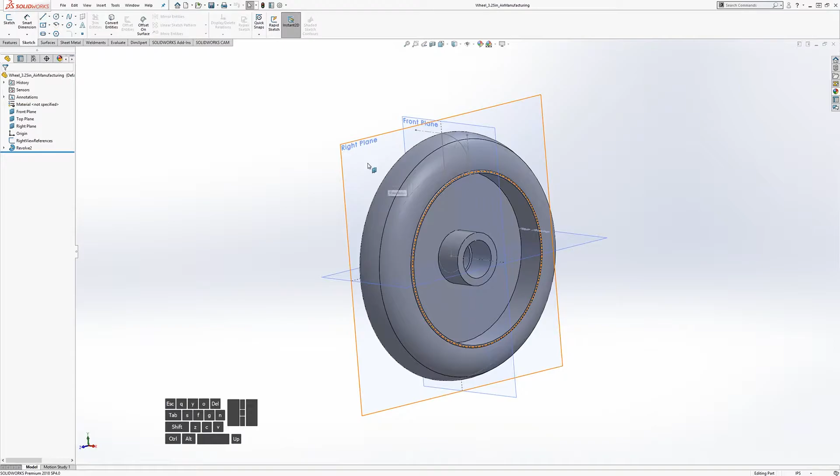Alright, so we're going to do the cutouts now. We're going to start off in the right plane sketching, and I'm going to check out our pictures here.

The cutout starts just a little bit outside of the outer hub diameter, so 0.75 instead of the 0.7 we had here. Also we have the measurement of the spokes, so they're 1/8 inch, 0.125. There are 4 of them, and you can kind of see there's a radius on each corner.

So we're going to use the circular pattern. We just need to draw one of these cutouts and then pattern it around the circle.

So if we start our sketch, let's say we make a center point arc like that. And if we do it the wrong way, we can just sort of back it up. There we go. Let's close this up, just to start off with the concept here of the cutouts.

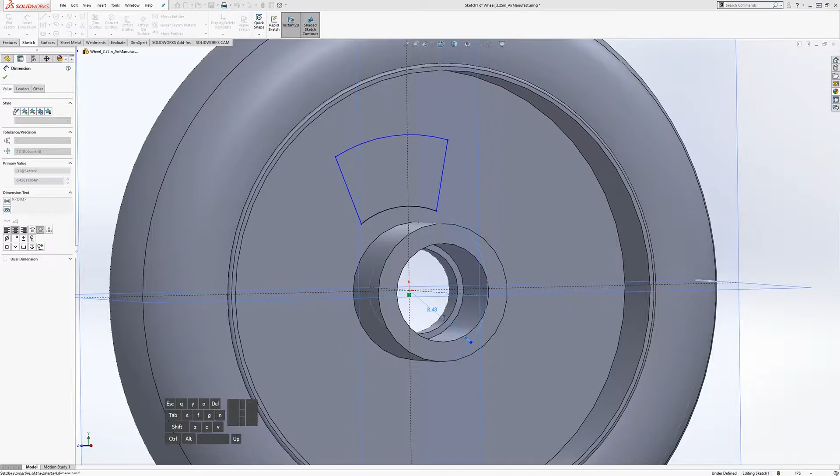We're going to need to use some references to get those measurements accurate here. We know from our measurements that this was 0.75 from here, or a 0.75 inch diameter. So we could just straight up tell this that it's 0.75/2 and give this, just for illustration now, an arbitrary one.

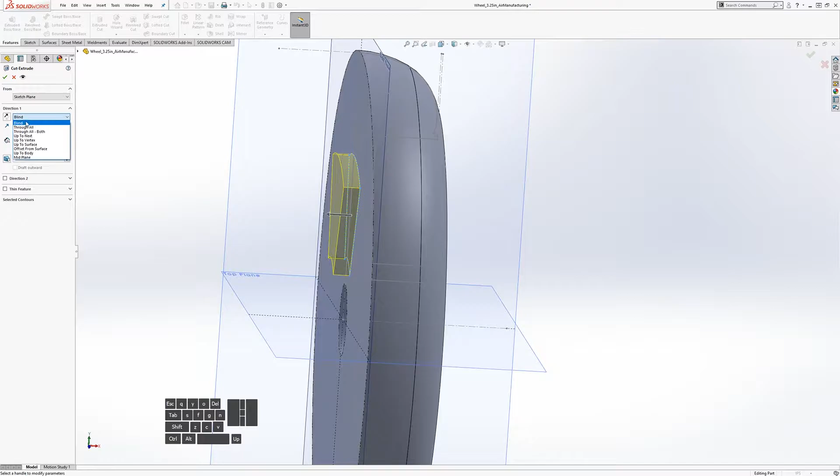Let's say we use this sketch to make a cut. It's coming from that side, so that won't do anything. So we're going to make it through all, and we need to flip its direction.

That's going to start off looking about right, but we want to just keep this sort of more true to the way it's manufactured. The intent of the dimensions here is that there's a small...

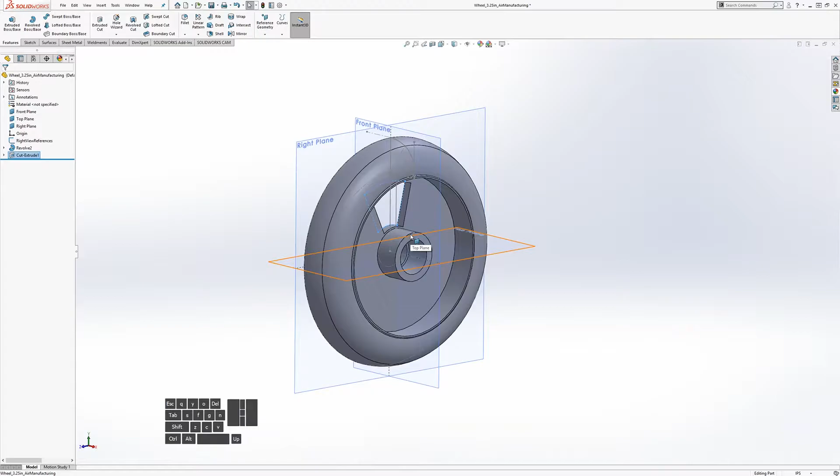...space here between these two radii, and I know that Air manufacturing produces a bunch of these wheels with different versions of the same design. So like in your shop you might have this 3.25 inch diameter wheel, and there might also be some 4.5 inch diameter wheels that look the same in terms of their geometry but are different sizes.

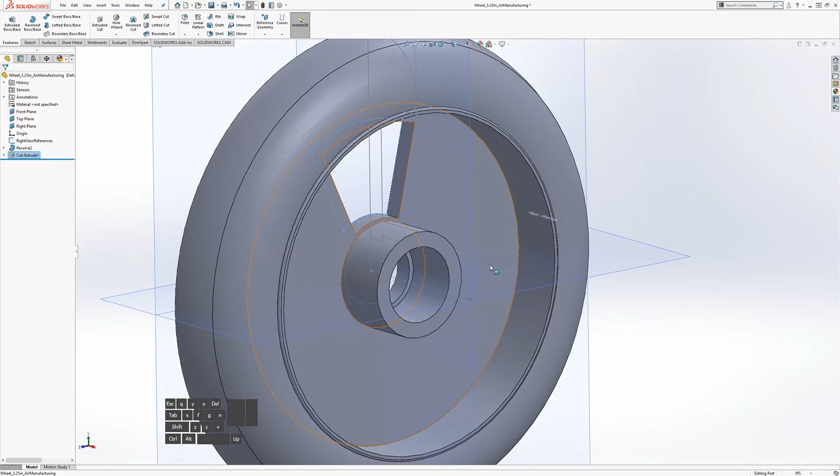In that case you would want to take this stock part and just save it as a different diameter, then modify as little as possible. So in general, it's good practice to, instead of doing what we did, take measurements relative so that the intent is there, and if you change something, the intent is still there.

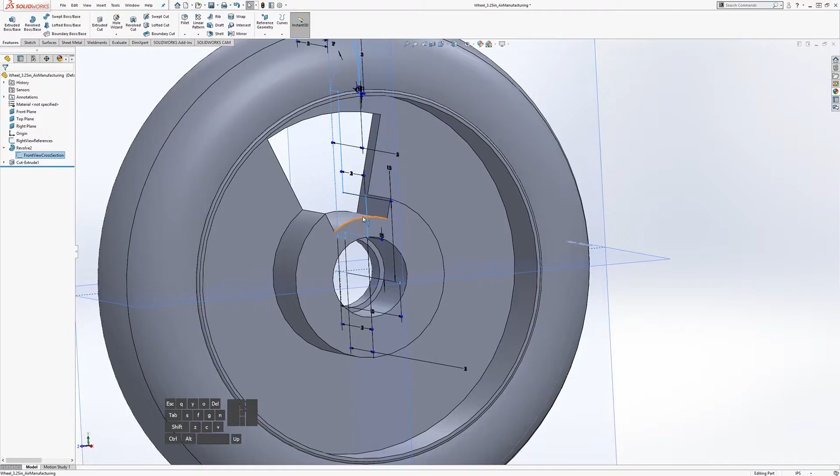To illustrate that, let's go back here and start to change this wheel to be more like a 4.5 inch wheel. So we could tell it that it's 0.5, and then whoops, we have kind of a bit of a mess that doesn't look the way we want it to.

We have to go and find which other dimension to change to make it how we want. So instead of that, we're going to use a relative reference, and it'll be able to update whenever we change it.

So if we go back here, let's get rid of this guy. This one's unconstrained now, and we have this from the previous sketch we can use, but we really want to take one of these, either this guy or this guy, and we can project with this projection. Convert entity is equivalent to projection.

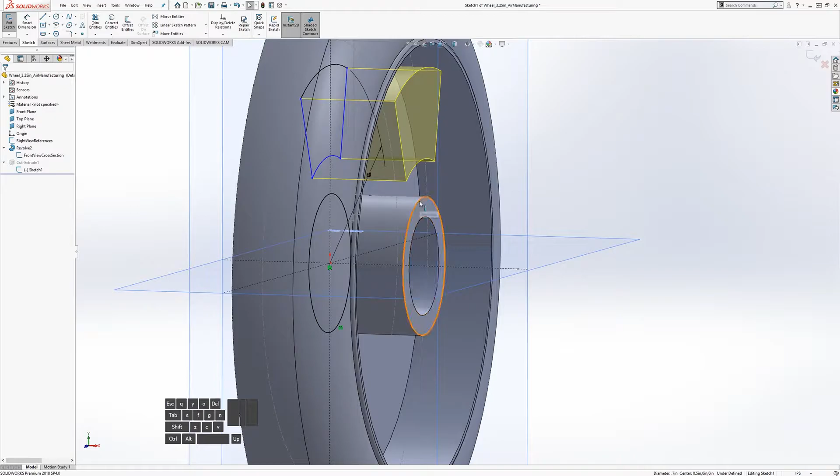It'll take this plane and sweep it out, and then anything it intersects will project itself onto the plane that we're sketching in. So you can see that worked, and we could use this as a construction, but we're going to be changing...

...this is going to be filleted later. It's kind of confusing if we're going to be projecting things that get filleted later, then it could get kind of messy. So let's not do that.

Let's instead - we know that no matter what we do with our features, if we fillet this edge, our sketch will still be the same thing. So we'd like to refer to that instead.

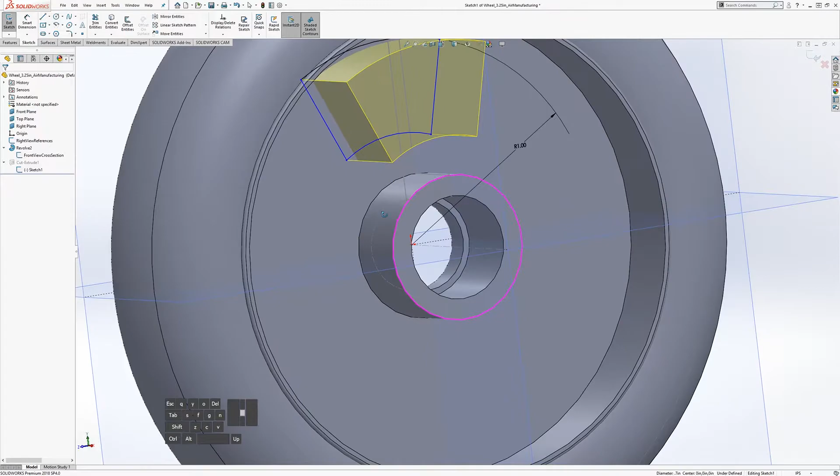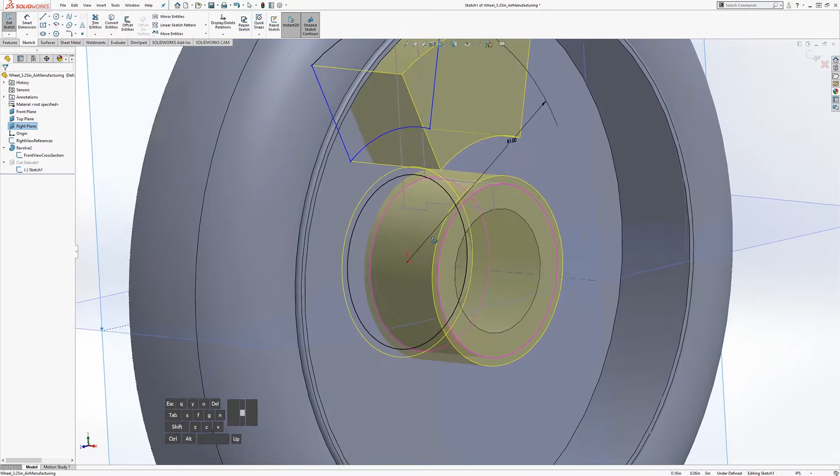So how about we make a circle about where we want it, and let's make that circle coincident to here. That's going to be a construction because we don't want the cut to go all the way down to there, and we don't want the cut to include all this circle. So that's for construction, and now we can refer to it...

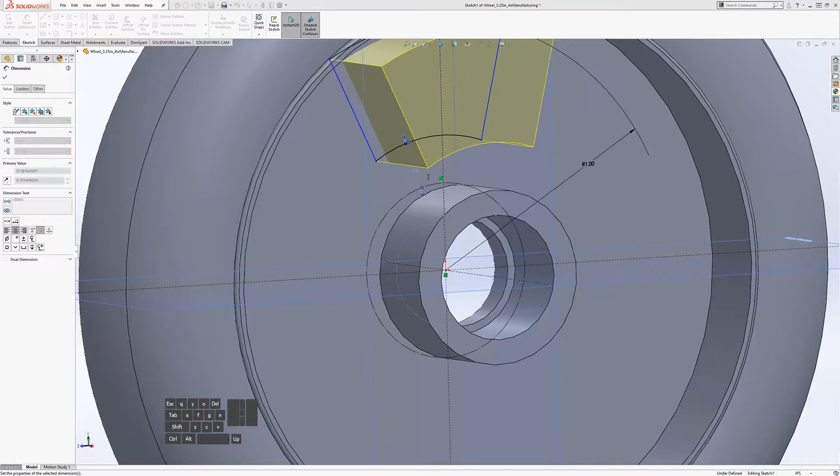...and tell it that this is 0.05/2. And now, if we were to exit this sketch, that looks the way it should, the way we want it. And if we go back and change this to 0.5, there we go - a cleaner wheel with less work.

So that's why we're going to use those sort of relative smart dimensions here to upstream sketches. So if we go back, and let's just Control Z that size change. We're going to need to give this fillets, give the right spoke width.

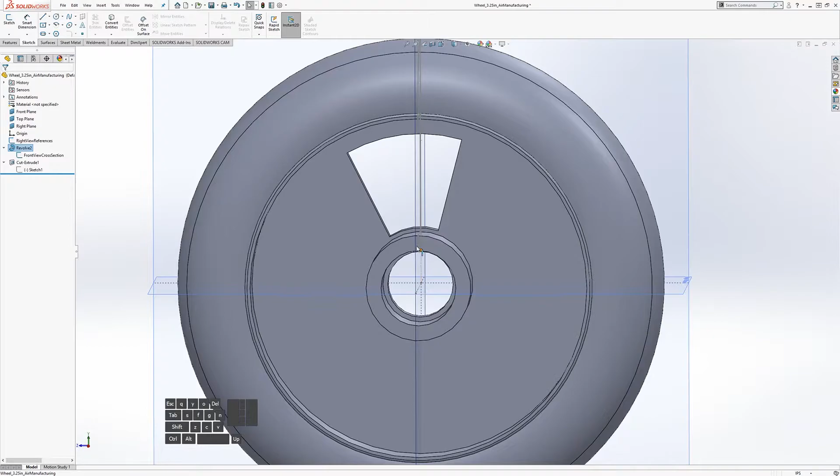So it's going to be more convenient to map out a 90-degree or a 45-degree segment and do the pattern off that. Let's go back in here and make some more reference geometry for us. So how about we... that's not what we want it to look like.

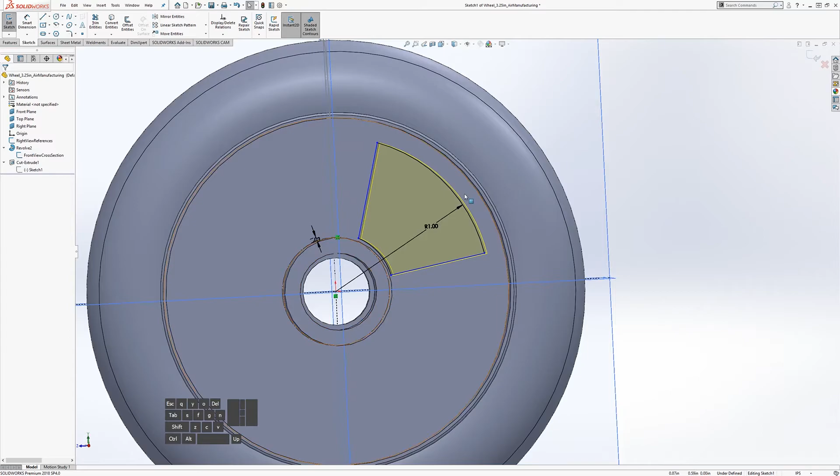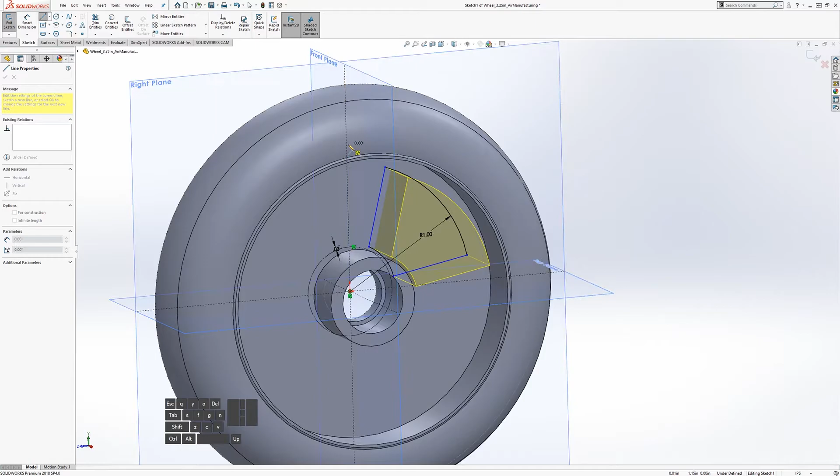Something like this. So let's map out a section of this symmetric section, a 45-degree segment here. Let's hide this so we're not referring to two different sketches at once. And let's first visualize that one and hide this one. We're just going to make a line over there, and then how about a 45-degree line to that?

So let's just get that at 45 degrees. Make these construction.

And we also know that we're going to cut out the same gap here on the top, on the inner wall of the rim here. So let's make another circle like that. So this guy.

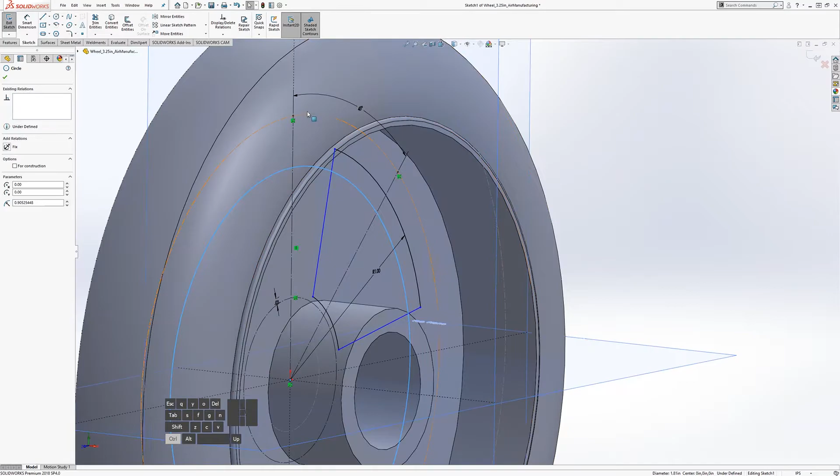Now we could use either of these sketches. May as well, actually this one is already in the right place, so we could already take a measurement off that one. Okay, so that's telling us that we're having an overdriven constraint here because I forgot to delete this 1-inch radius over here.

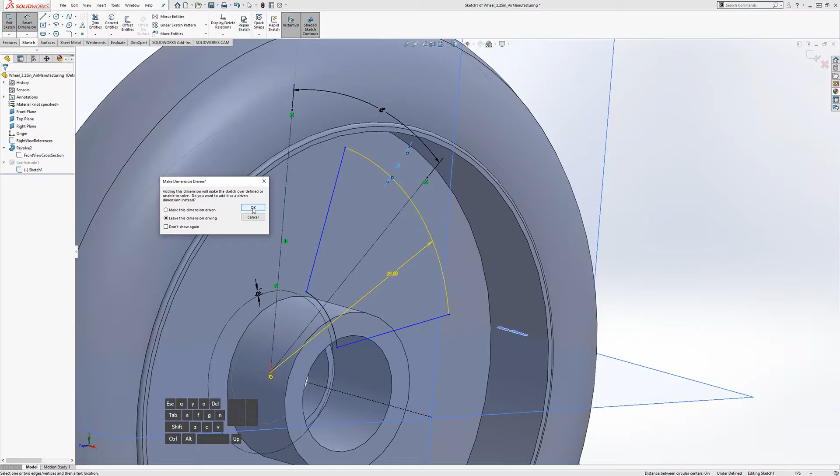In that case, we can choose which of these drives the dimension. So if we leave our new dimension driven, then it's just going to be sort of a reference measurement. If we make it driving, we're going to have some overconstraints here, as we can see.

So if we chose instead to leave this driven, then you can see it shows up gray, so it's not a real constraint, it's just a measurement, and you can actually refer to it. So sometimes it's useful to just have a reference measurement.

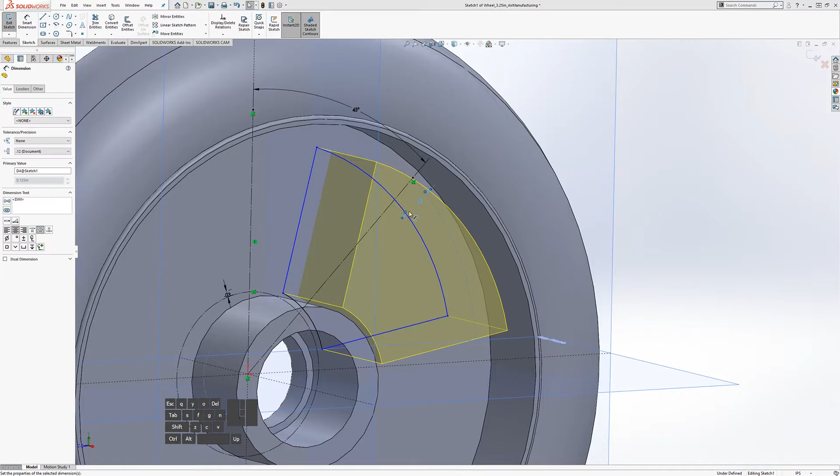But in this case, we are going to get rid of this guy. So we have to get out of here, delete that one. And then this is a measurement, so it's telling us we can't change it, it's just a measurement. But we're going to go in and tell it to be not driven. We could have also just deleted it and remade it again without this 1 inch radius, and then it would be able to tell that we implicitly want it to be driving that.

So I'm going to go here and change this to 0.05 over 2. So that's good.

Now we're definitely going to want, so let's say, I'm going to bring this up here. Let's say we're gonna cut out this 45 degrees, make these circles here so that it's smooth, and then reflect that on this side so we have sort of a cutout on the top, and then we'll do a circular pattern all around. So here, this guy we can already tell we want it to be collinear over here.

The other one, we can tell it we want collinear over here. And then we have to make the radii over here.

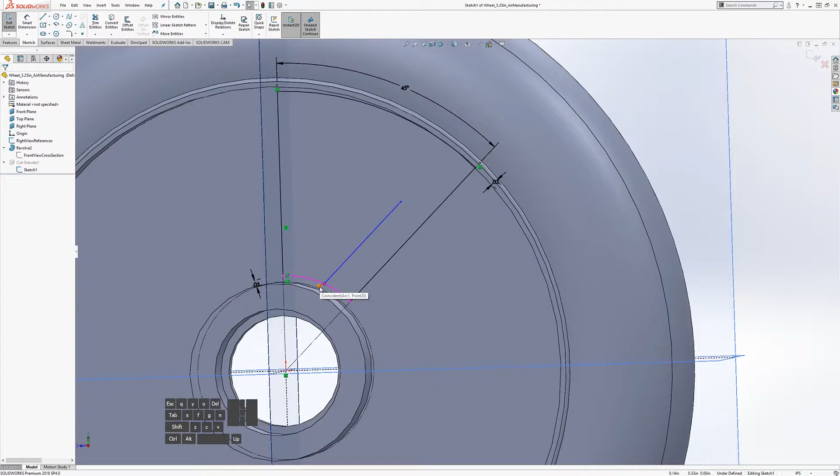So sometimes if you don't want that, you might just want to, instead of bringing it close to that line, just purposely put it somewhere else so that it only created the coincident here, which is all I want for right now. So I'm going to make another coincident, make this line parallel to here, and then I can give this guy a dimension of 1/8 over 2.

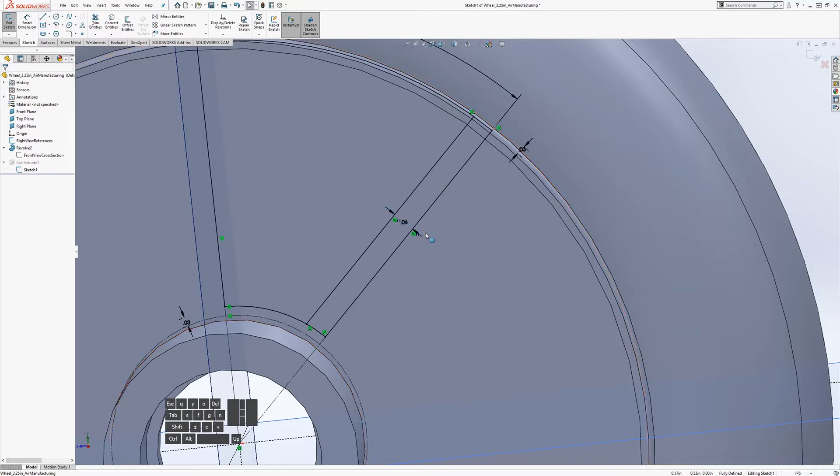So, is that it? That's 0.125 over 2, there we go. So that's half the width of a spoke. So that'll help us to create the spoke. So the other side of the spoke is going to be here.

We can start filleting in here. So we're going to create the other geometry here. So let's get tangent arcs. So we need endpoints to make tangent arcs actually. Let's make a circle instead.

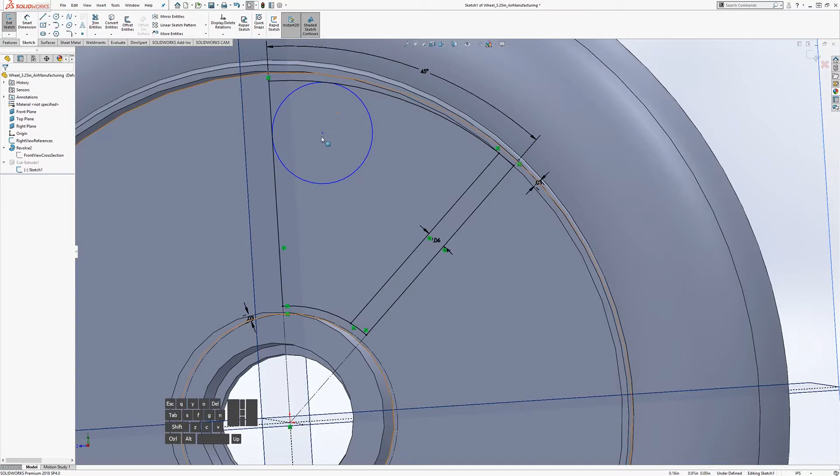And we can choose that to be tangent here, tangent here. So that can kind of be one of our fillet radii, and we're just going to end up taking this portion of it. And let's do that for the other corners. So actually, well, this side is going to be reflected, so we don't actually need it on this side. We really need it on this side over here.

Tangent to here. Tangent over here. Let's make another one down here.

Whoops, I chose the point by accident. Okay.

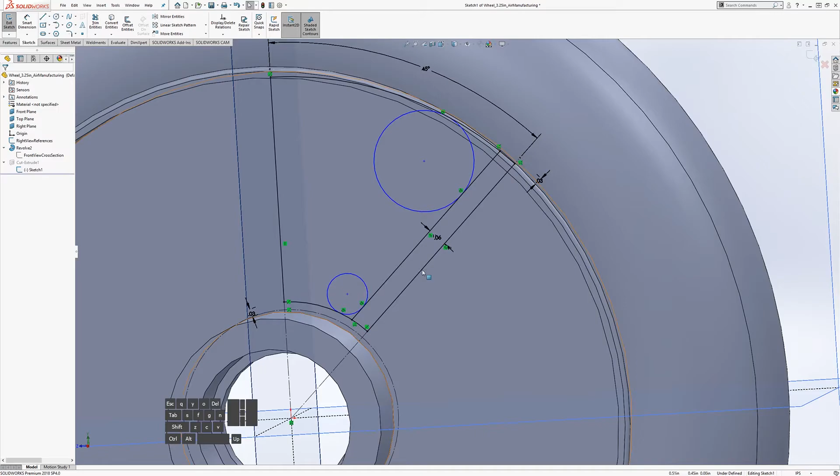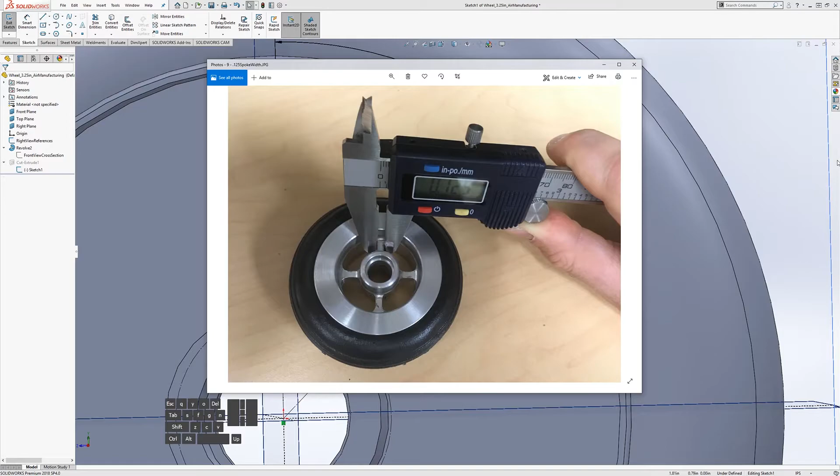So we kind of need a measurement now of what the radius of the circles is, and that's a bit hard to measure. You could take several convex shaped objects, like cartridge bearings or something of this approximate size, put them in there and see if they fit well, then measure the diameter. It might take a few trial and errors to get the approximate radius, so let's just do it until it feels about right.

For now, I'm gonna tell this one to be 0.5. No, that's too big. Let's say 0.3. This guy, let's try 0.125 to start out with.

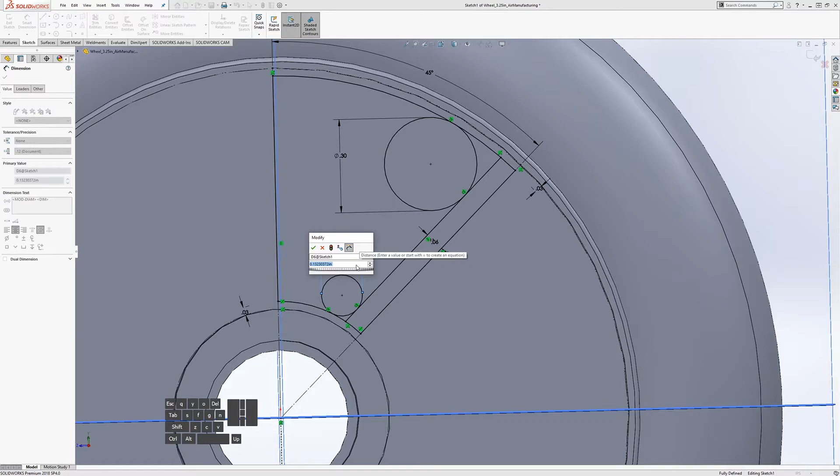So you can kind of see how we're going to use this: this line will be part of the cut, then we'll transition into the circle, then this outer line. All of this will be the mirror line for the cut, and then this over here, and we'll do that part of the circle.

But we're gonna do this cut in 2 stages actually, I think, so that we can easily go back. This is a pretty clean sketch.

If I start adding to this, cutting out, trimming, I can go over here and use, let's say, the trim. A lot of people like this power trim just to start editing your sketch, but it starts to get more complicated. You can end up with things you accidentally didn't want.

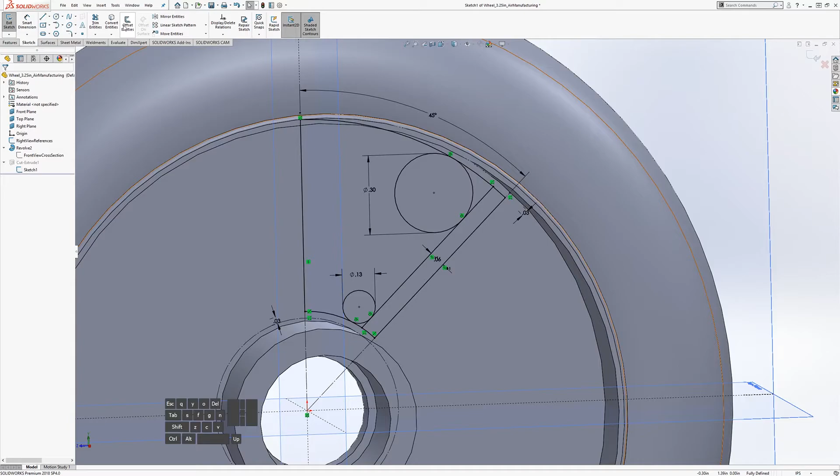So this is a pretty simple sketch. I'm going to do it in 2 stages instead of cutting this up. SolidWorks does have some amazing trim options here - you can do the outside, the inside, corners, and power trim is usually what gives you what you need for most situations, but sometimes you need to use these other options. But when we don't need it, let's not use it.

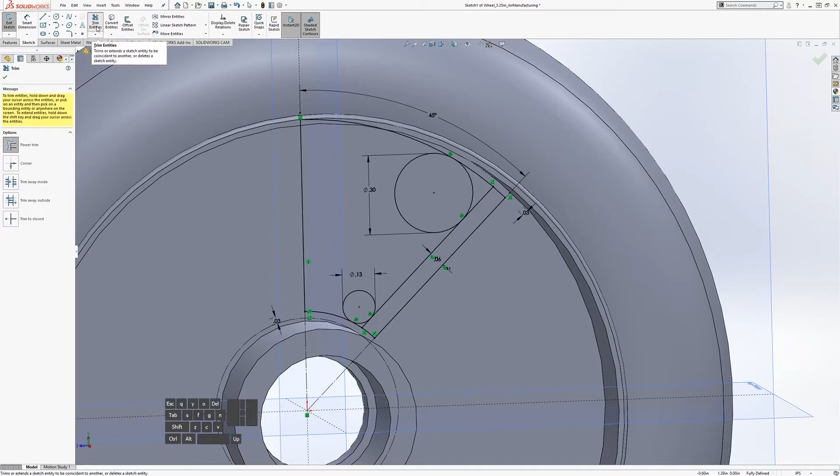So let's instead go ahead - this is not a proper cut because it's not a closed sketch. It has a lot of different, well, it's closed, but it's closed in multiple places. So we're going to get out of here and delete the feature.

I'm going to rename this - cutout, actually reference for the cutout. And then actually we should go back in here and make all this construction.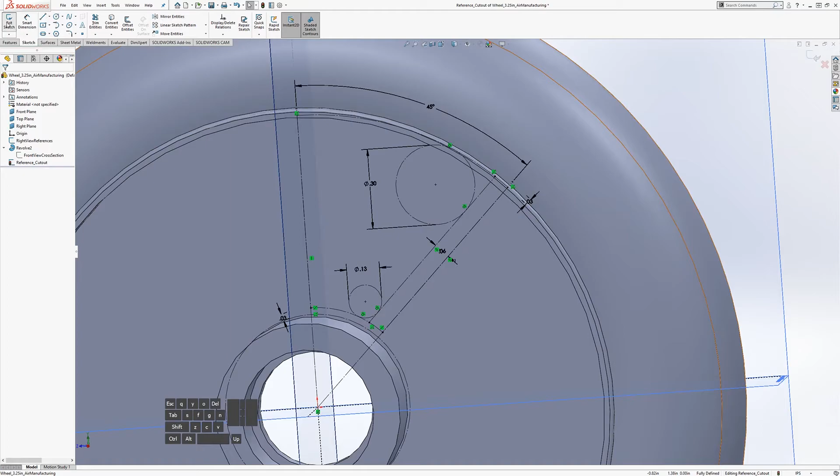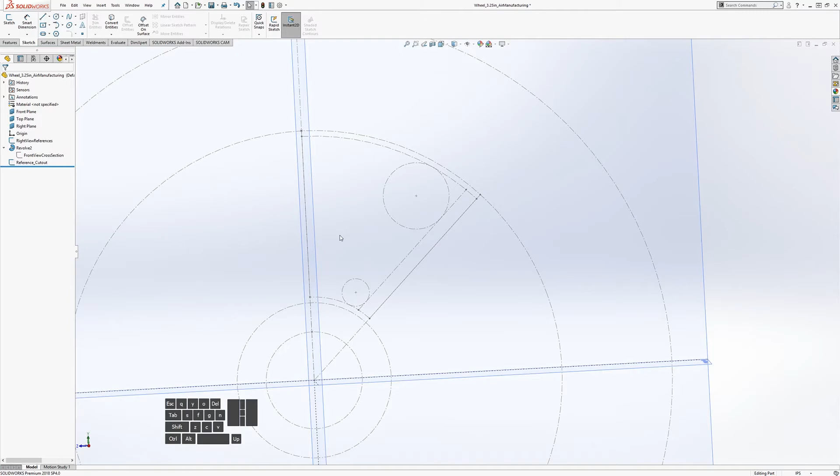We have that. It's been hard to see right here, but we can also just hide this guy and work in terms of these few lines that we need here to actually see what we're doing. We can even turn these off also to have a better view here.

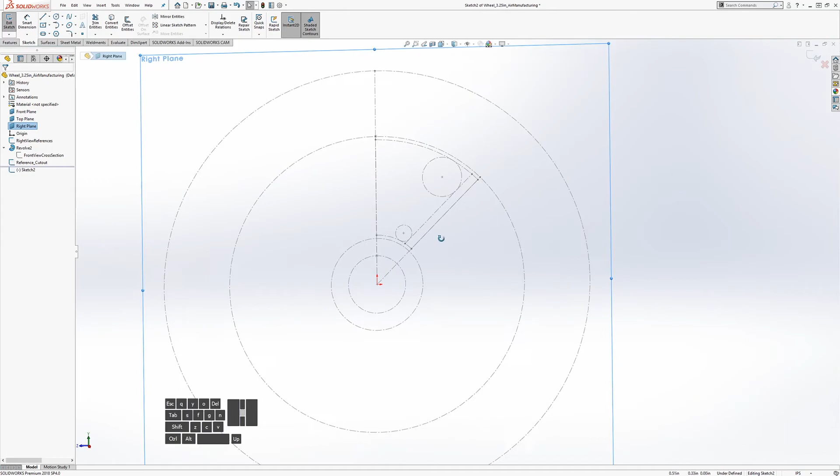So let's make a new sketch in the right plane and use these guys as references.

We could go ahead and, sometimes it's kind of nice to just go ahead and project the ones you need in, and then trim out the parts of it you don't want.

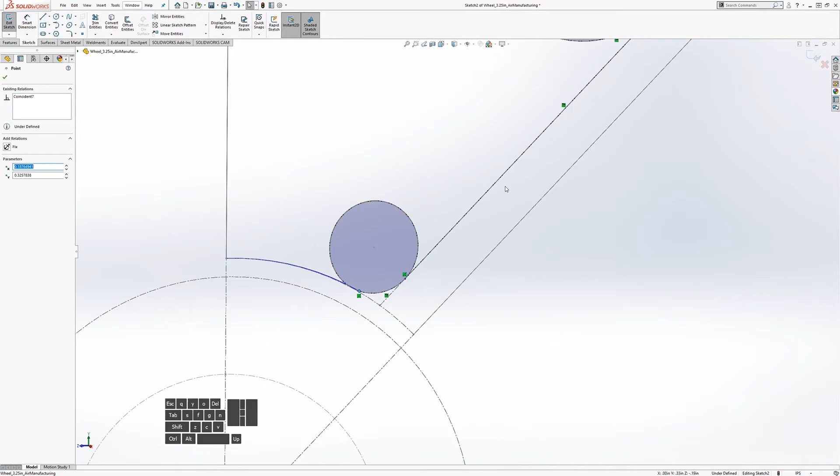You can even try just power trimming. So you can see that turned blue for a second - I wasn't quite sure for a second. You can end up with accidents, that's not what we intended there. If we get messy with power trim, you can go and carefully do it with the corner trim, outside trim, things like that, and keep these all as projections.

But projections, I would use them only when you need to - so if it's not too much extra work to actually create these lines bit by bit. Let's go ahead and make a...

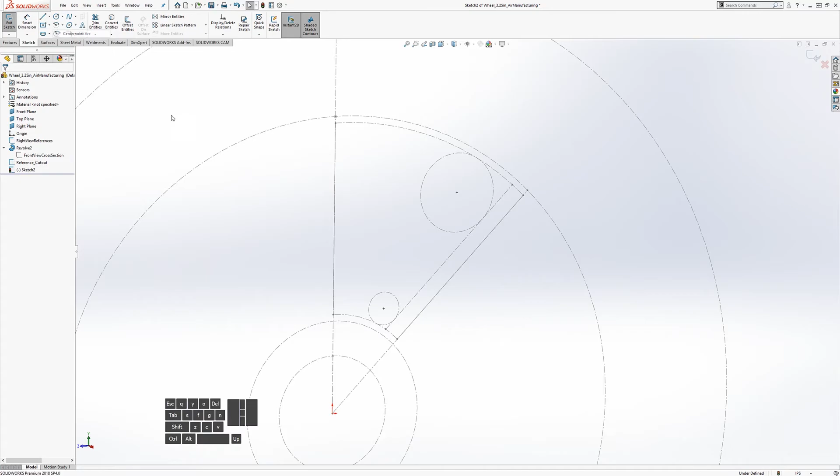Arc there. Arc here. So these are going to be coradial, that will occupy the same space. This and that will be, actually, yeah, we can merge these. And we want these to be tangent, which I think is implied anyway. Let's see - yeah, that didn't add any constraints, so that's implied anyway.

So we're going to use a line on here that is linear. You can merge these guys - they're fully constrained, so they don't need any more. Same thing over here.

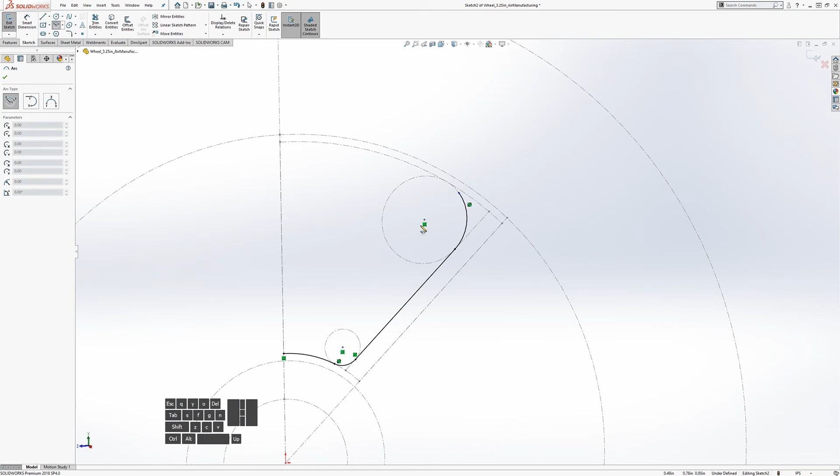Do it this way, like that - coradial. Merge these guys. Same thing up here. That's going to be from here.

Coradial, merge these guys, and this I can make coincident to that guy. Alright, so that's cleaner than that projection.

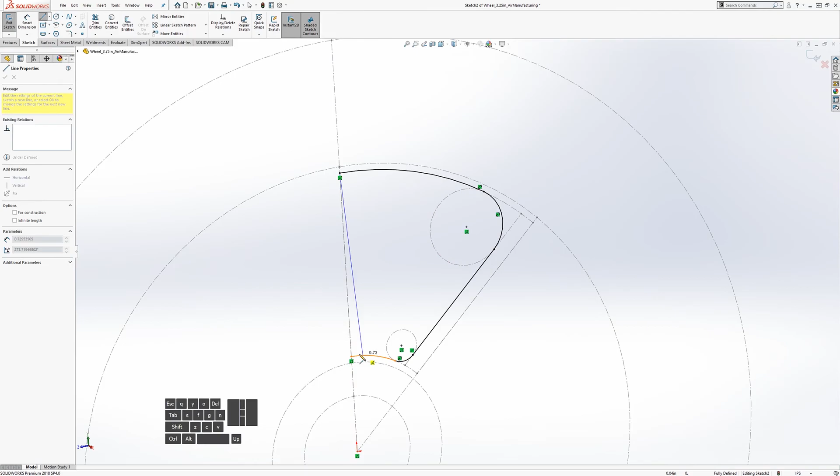We just started trimming everything - there's not as much going on here. It's clear what we're looking for if we need to go back and edit things later. Close it up, and we can...

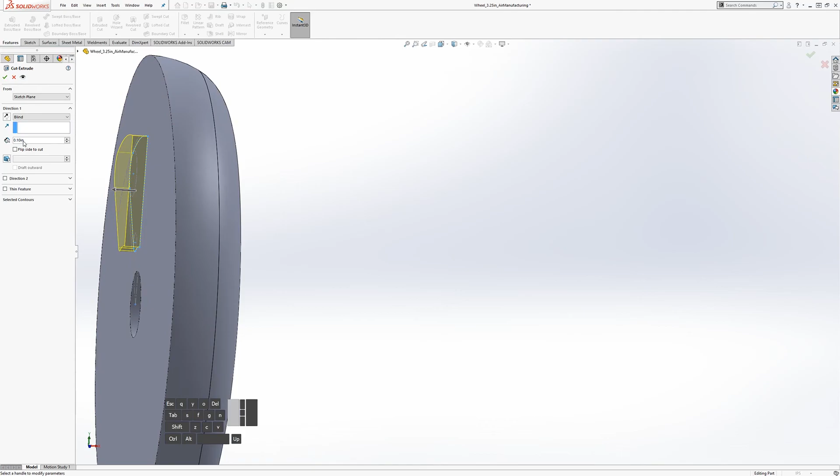Visualize here again - so how are we going to use that? So we could just go ahead and cut through all this way, and that's starting to look a bit like it.

Need to mirror it. We could mirror this pattern in, I believe it's the front plane. So that gives us one of those cutouts.

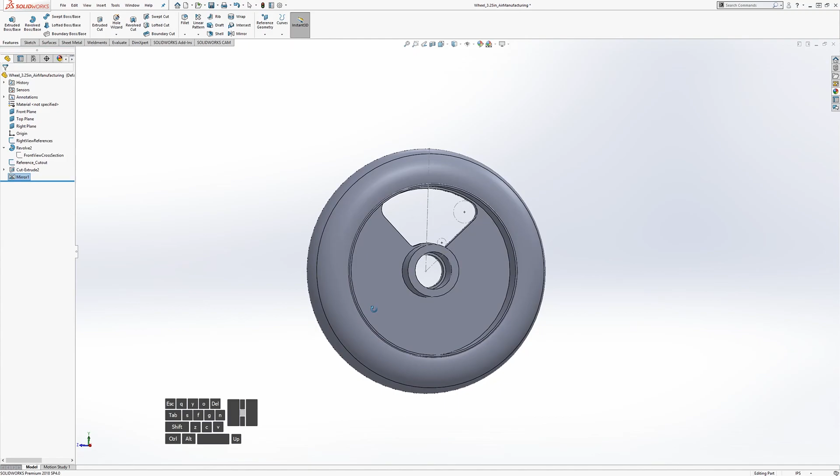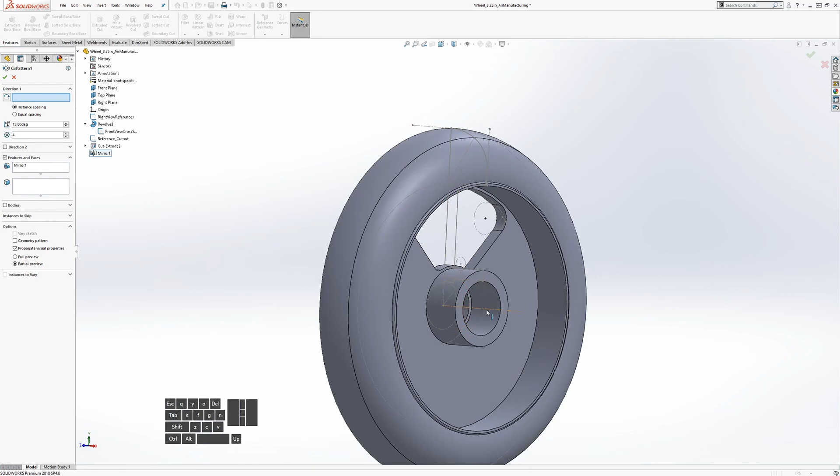But now we could go ahead and make a circular pattern of that. So we need our axis again - let's go ahead, that was in here. If we visualize that, we can take that axis and make this 90 degrees. So that looks pretty good for now.